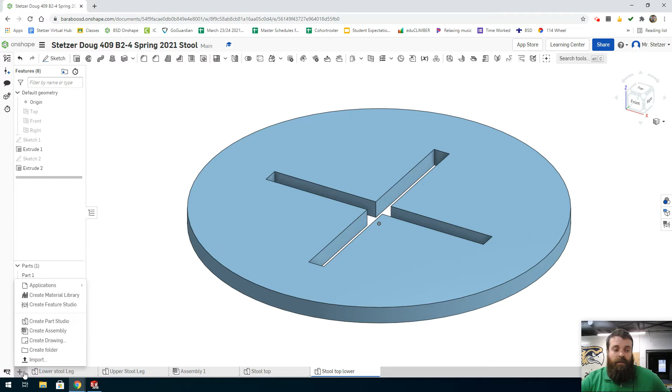In this video, I'm going to demonstrate how to assemble both of your stool tops together. For this, in the lower left corner, I'm going to select Insert New Element, click once, then Create Assembly, click once.

I'm going to rename this assembly stool tops. I'll right click on Assembly 2, click Rename, and change this from Assembly 2 to Assembly Stool Tops. Enter. Okay. While we're doing this, we may as well rename our first assembly for our stool legs. So right click, rename, assembly stool legs, enter. Okay.

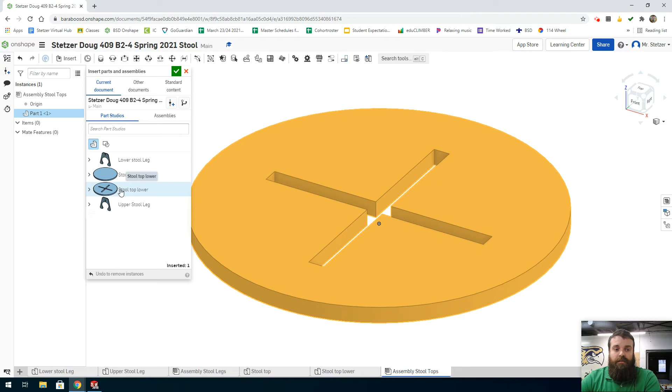For this, I'm still in our feature here. I'm going to insert two pieces. So I'm going to start by selecting insert. I'm going to select our stool top lower and our stool top. They are placed right on top of each other, and that's fine for right now. I'm going to click my green check mark.

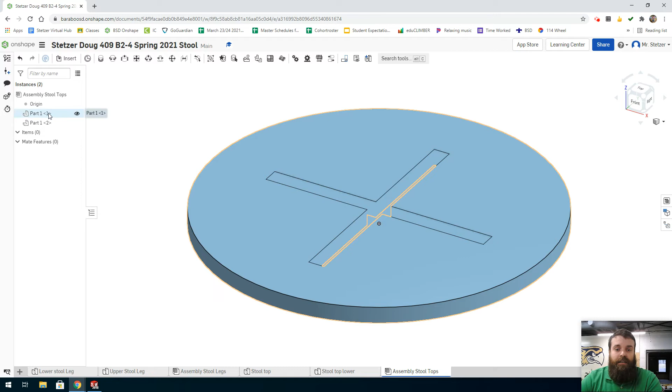You can see that we have that plus sign, but it's filled in, because we have two pieces in the same spot. What we want to do is select the piece that does have the cutout, because that's centered on the origin, this is exactly how we want it right now. So I'm going to come up to part 1, or hover over my parts, make sure that the piece with the cutout is highlighted orange.

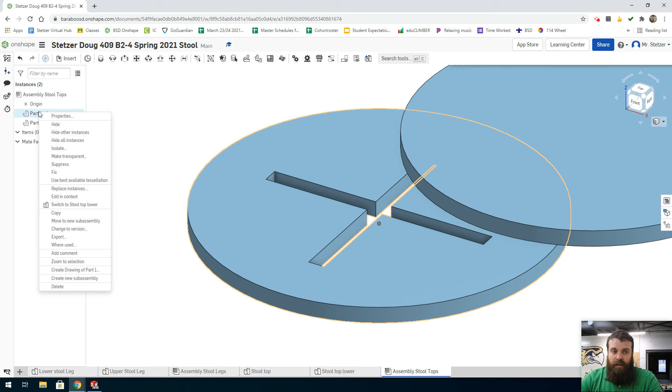I'm going to right click once, select Fix. So this piece is now fixed. It's not going to move, not going to rotate, not going to slide around on us. Whereas our upper stool top, this is still flexible. To make it so that it's not flexible, but these two pieces are locked together as we want, when we're putting our stool together, we can glue this, we can screw this, we can laminate it together. It really depends on what you choose to do with your stool.

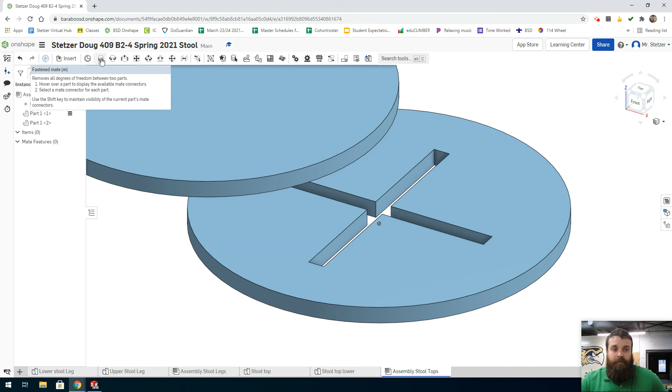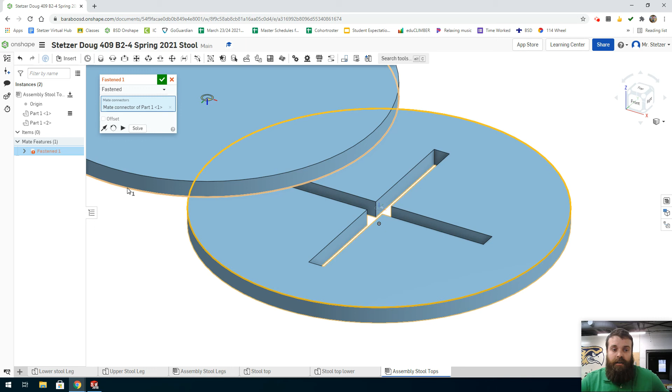What we're going to do for our model is come up to our toolbar. We're going to click Mate, or Fastened Mate, shortcut key M, and do a very simple mate. I'm going to hover over the top perimeter of my lower stool top, and it gives me that center point. I'm going to click once. I'm going to hover over the lower perimeter of my upper stool top, and it gives us that center origin point again. I'm going to click once, and it mates these two features together.

I'm going to click my green check mark, or the red X because it's asking if we want to make a second mate. Okay, and go ahead and try to move these. They don't move. They're stuck together. They are fully mated and assembled.

In our next video, I will demonstrate how to assemble your stool tops onto your stool legs.